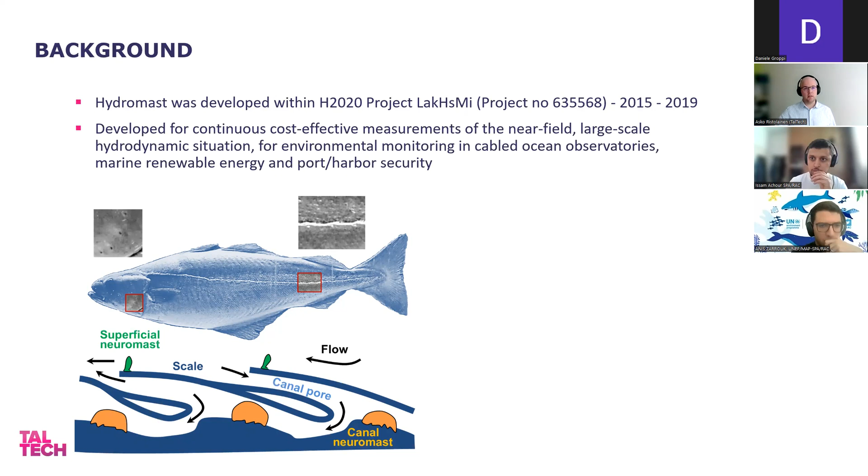The device itself is a small, quite cheap point measurement device that allows to take measurements near the seabed, or actually that was what it was planned for initially. It's bio-inspired. Just a short information about the bio-inspired aspect: fishes have these small superficial neuromasts on their lateral line sensing mechanism. And we took this idea and made it into a sensor that you can see in the picture here. This is the very first prototype back in 2016, where we used accelerometers and 3D printed parts. Since then, we have developed this sensor further to be usable also in field applications.

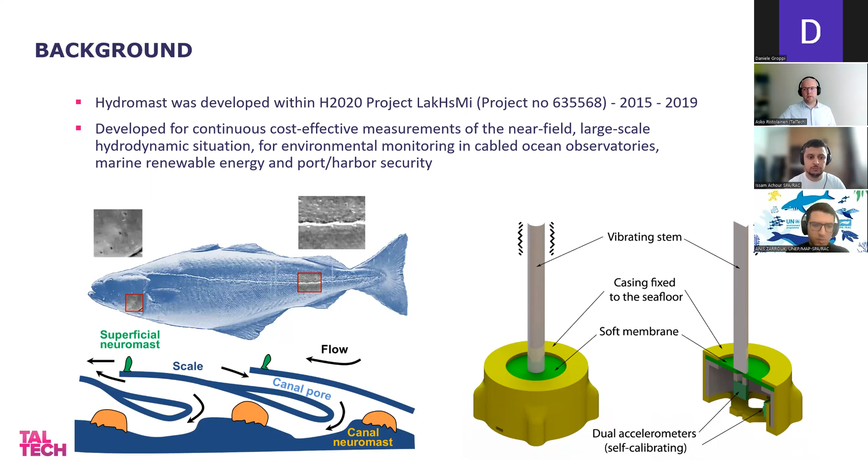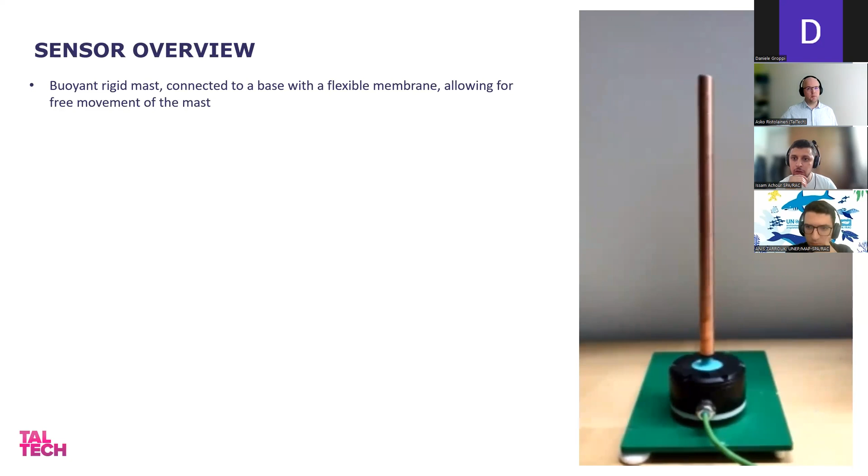So now about the sensor itself. The sensor uses a vibrating mast, and by looking at the vibrations of this mast, which is fixed to the base through a flexible membrane, we're able to measure flows and flow directions, and we are using two different measurement techniques. In order to measure the tilt of this mast, we are using a 3D Hall sensor inside the body of this device, and we are using two ways to measure flows.

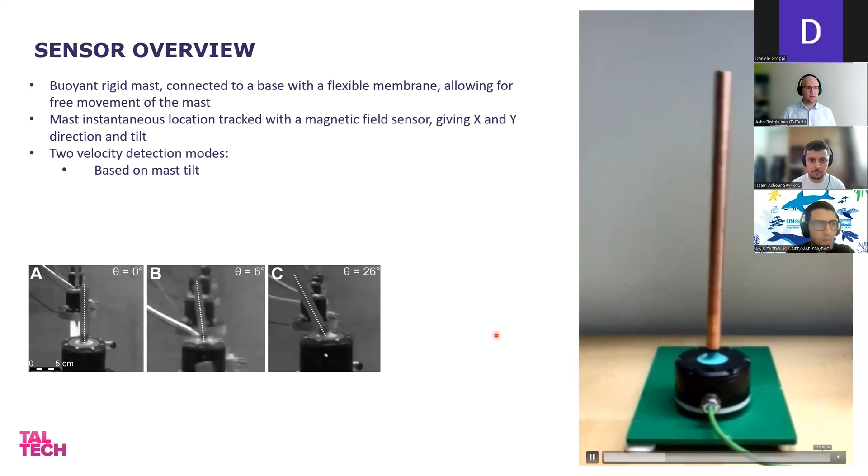First of all, we use the tilt of this mast to say how strong the flow is. So this means that we can measure the velocities instantaneously. And the second method that we're using for measurements is the vibrations that are caused by the flow.

So if the device is in a flow field and the flows are continuous, there are vortices that are shed off from this mast. And by doing a Fourier transform on these vibrations, we can then correlate it back to the continuous velocity. So the second method is basically used for averaged velocity estimates.

And also we can tell the flow direction from the mast tilt, so you can also say where the flow is coming from. And also inside the body of the device, we have an incorporated absolute pressure sensor. So we can measure the waves at the shallow waters, and also sea level if the device is installed at higher depths.

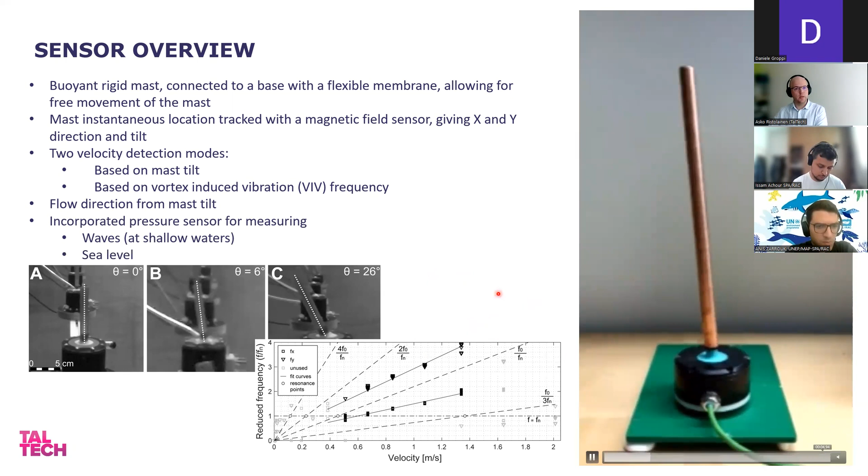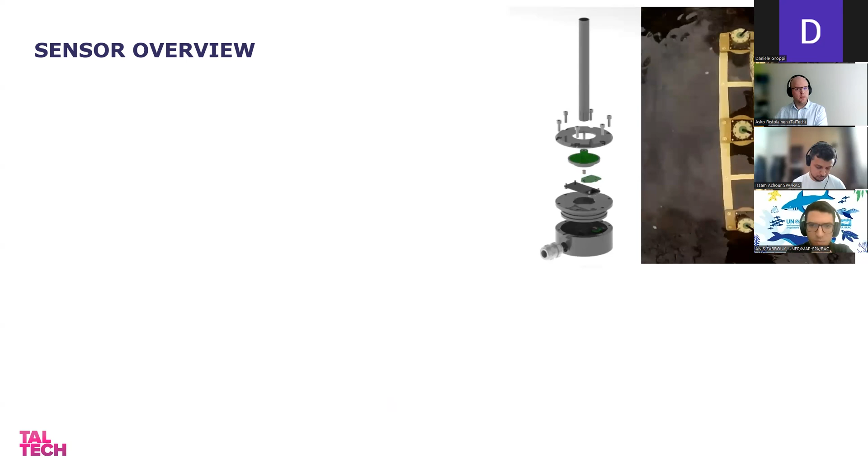So, more about the overview of the sensor. The sensor can measure flows in different flow ranges, and it's dependent on the height of this mast. Also, we can have different kinds of pressure sensors on the device to allow the sensor to be installed deeper, or if we want to have higher resolution of the sea surface fluctuations, we can have a smaller range pressure sensor on board.

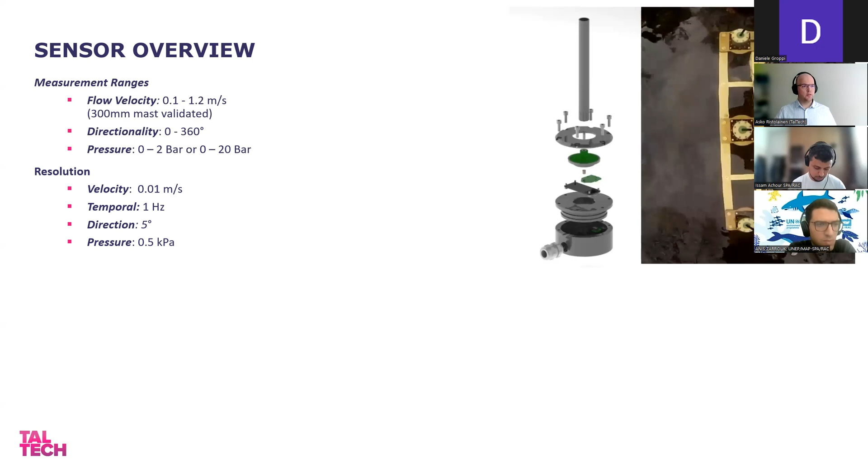Some information about the resolution. Accuracy of the device: it's calibrated and compared against a Nortek Vectrino ADV in a lot of validation experiments. And from the device, the data output can be selectable, although the device itself is working at 50 Hertz, so you could get instantaneous velocities out from the device at quite high rate.

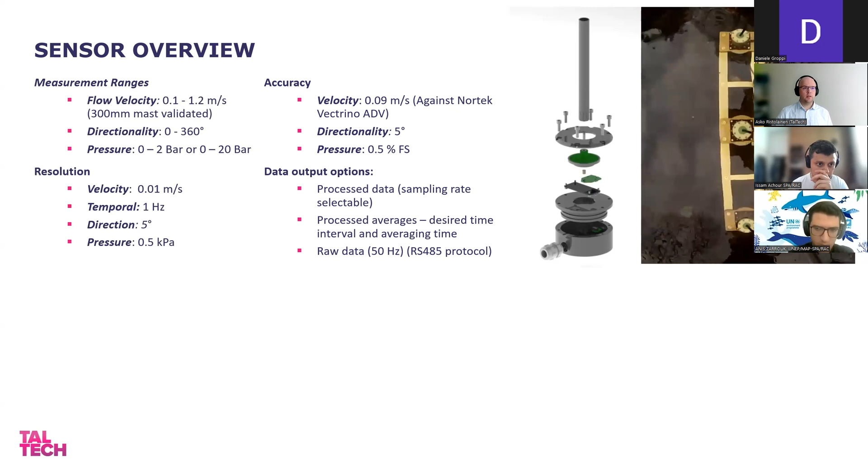And the communication of the device is working with the RS485 protocol, so we can have really long cables on the device. And some samples of some long data sets and some short instantaneous velocities.

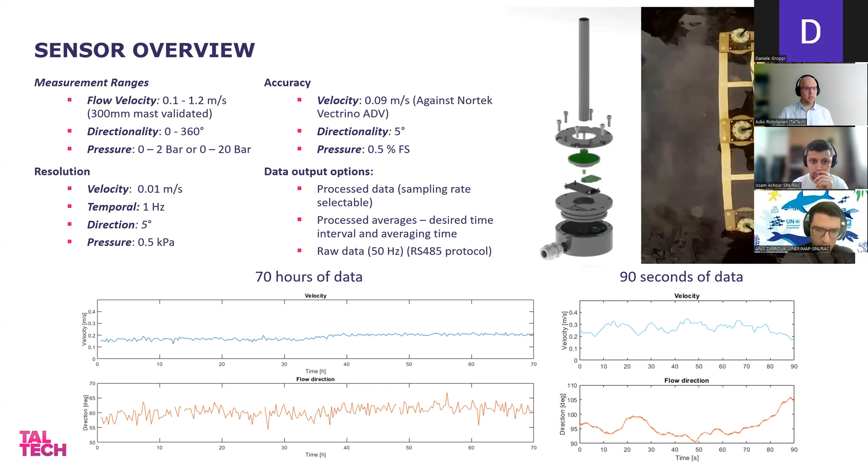So currently in ILIAD, the main aspect that we are working on actually is building communication possibilities for the device. So there are various ways you can get the data when it's installed somewhere in the sea or in the river. Directly from the device, as I said, you can use USB or RS485. That allows a communication up to, let's say, 500 meters from the device itself.

Then what we have built to connect up more sensors are these sensor hubs. With that, we use a mini computer inside there to interrogate the device, but also pre-process the data. So we use currently BeagleBones, but previously also we have been using Raspberries. And this sensor hub can then be connected via Ethernet, via GSM to the network.

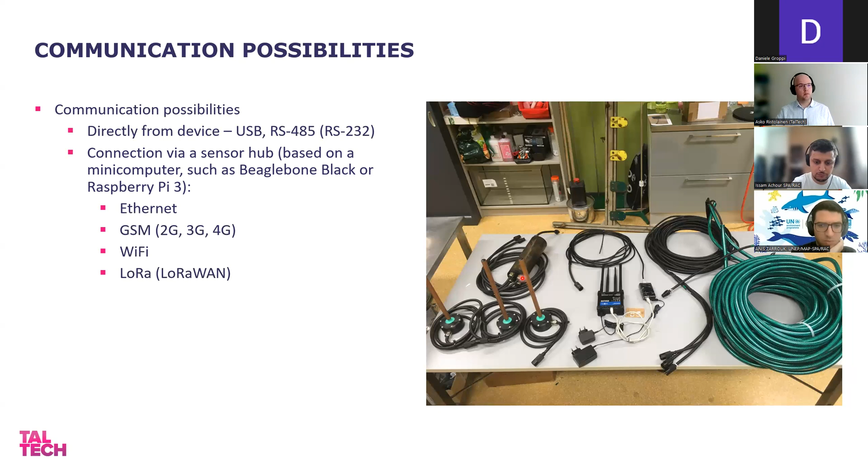You can use Wi-Fi. And currently the latest development is that we are starting to use also radio signals to send the measurements to the users. And also serial connection is possible with the sensor hub. So there is also a possibility to use the sensors offline. For that, we have a battery pack that can be installed underneath the sensor.

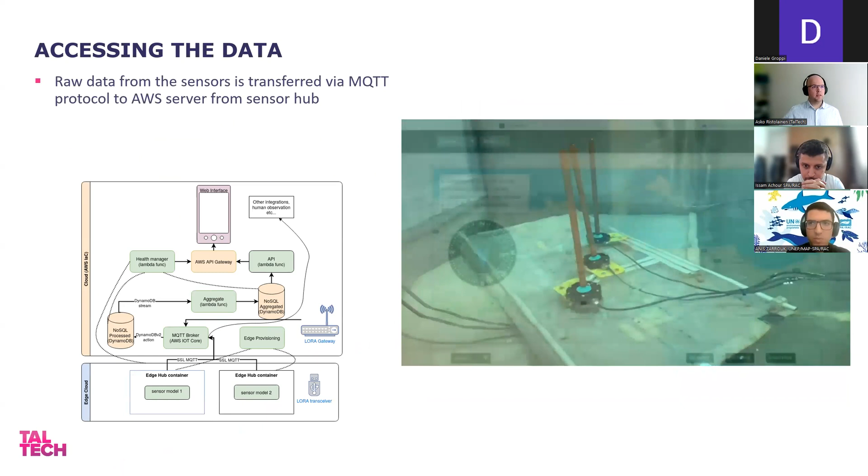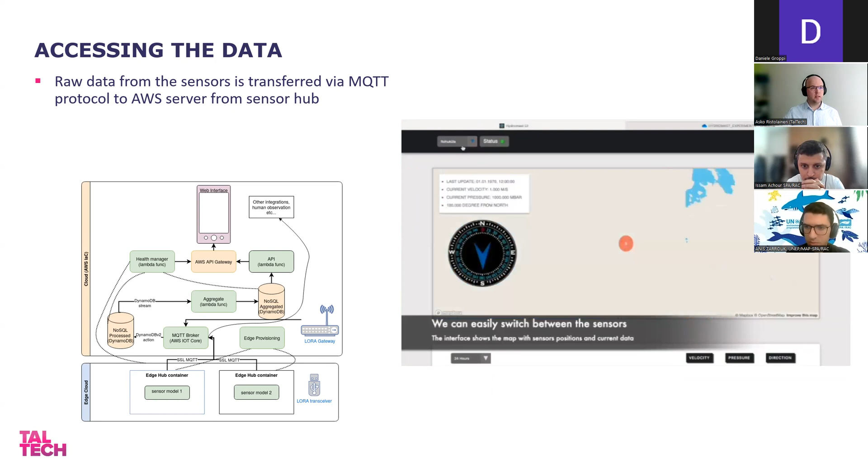So, how to access the data? The data is then, as I said, pre-processed in the sensor hub, and the data is then sent via MQTT protocol to Amazon cloud server, where the data is stored. And then the data can be accessed through AWS API for the different pilots.

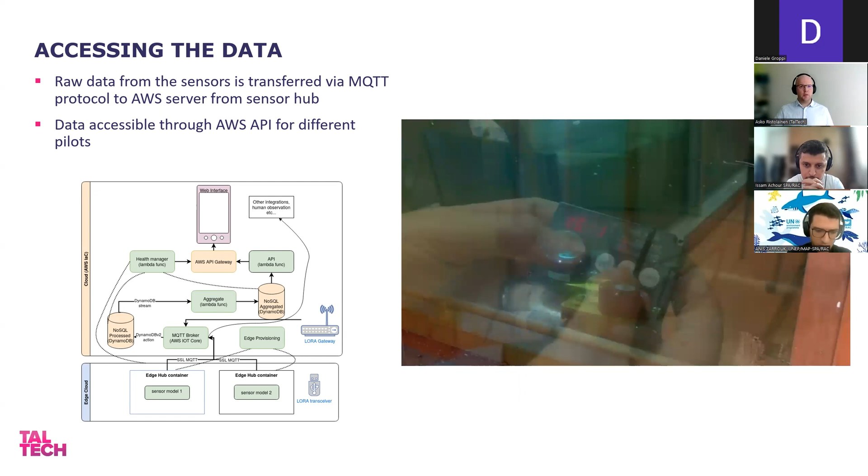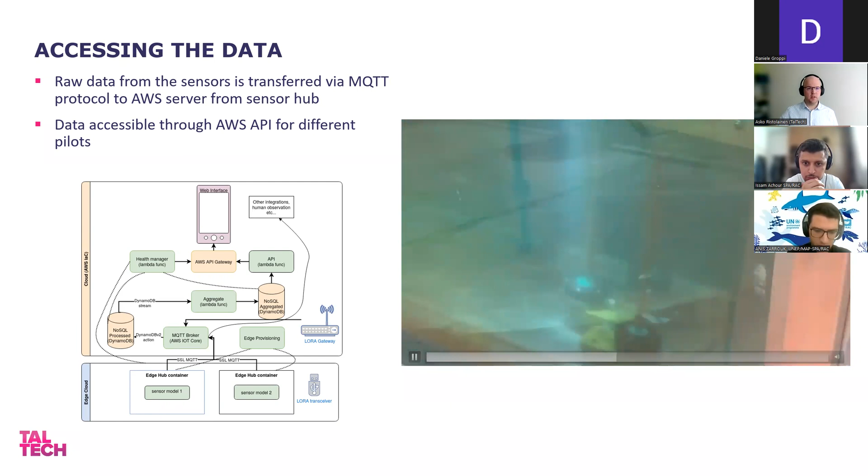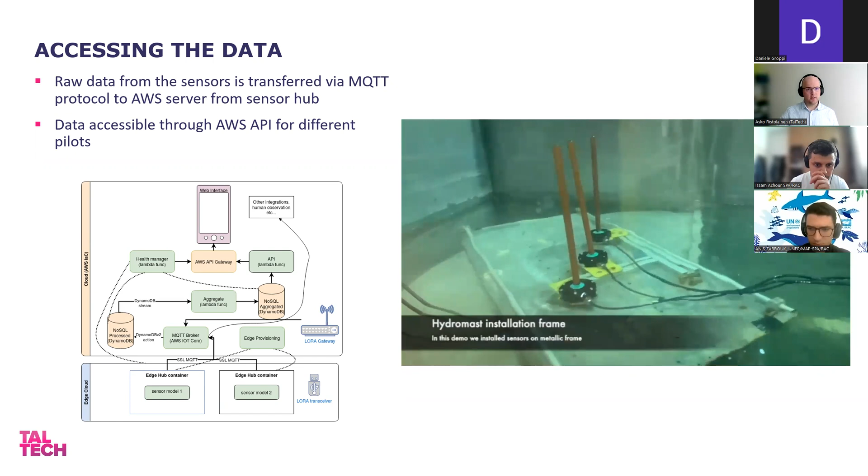And here on the video, you can see a sample scenario where the devices were installed in our own lab. Basically, we generated artificial flows, let's say. The sensors were picking them up. And then, okay, it doesn't play.

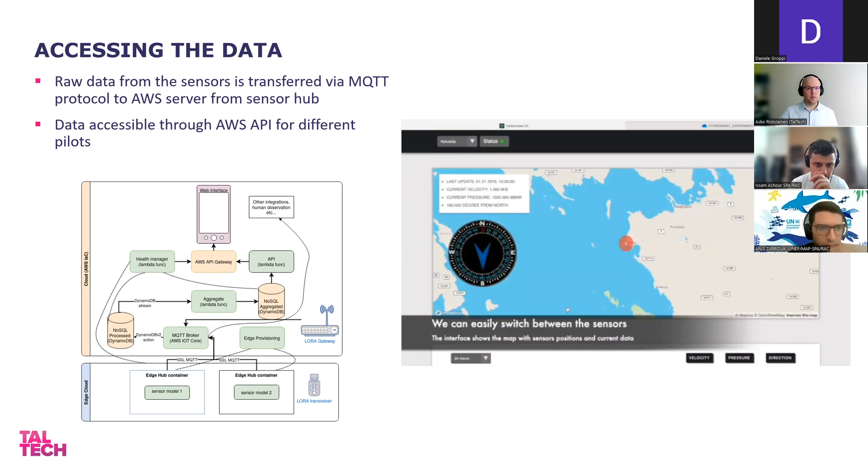Then at the end, we basically have a graphical user interface where different installation sites can be chosen, and data outputs can be viewed in this web interface. So yeah, just a picture of that. This is also being updated at the moment, for our own testing purposes.

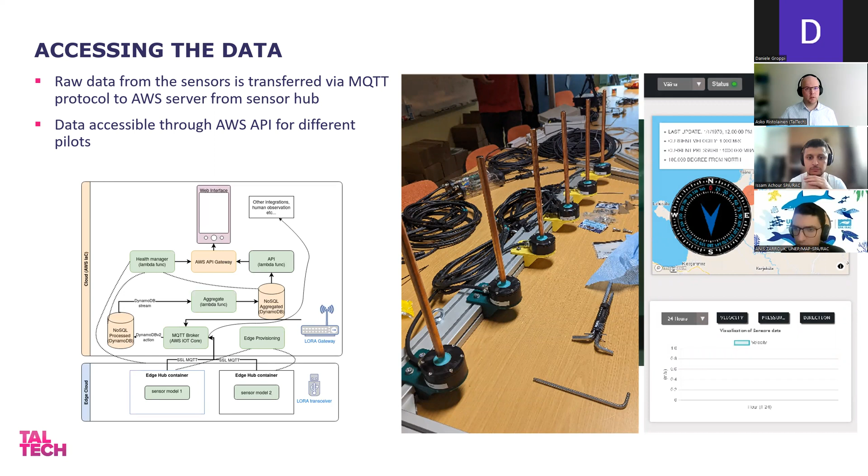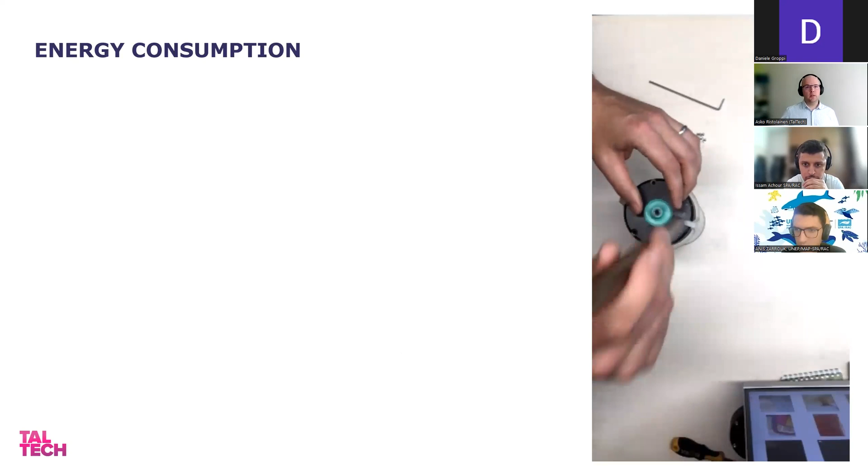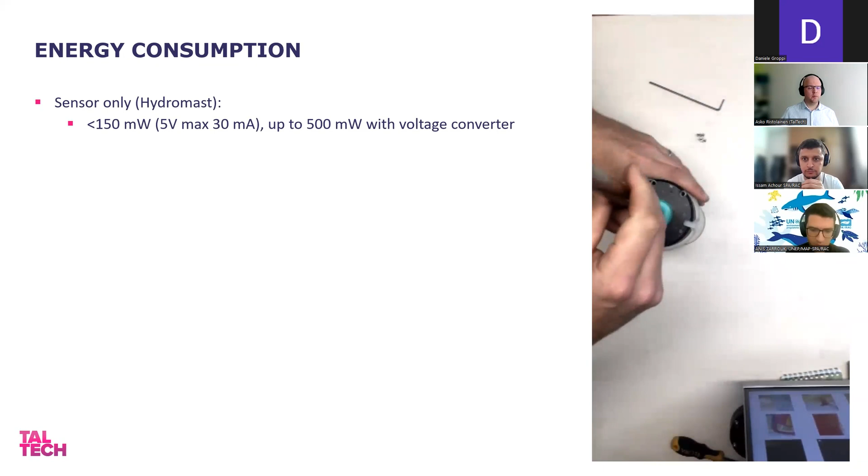So the energy consumption of the device is rather low. The sensor itself uses just below 150 milliwatts. It can be powered, the minimum is 5 volts and it can go up to 12 volts, the input voltage. Then with Ethernet possibilities, it's just below 3 watts.

When we are using GSM, this is actually the most costly possibility. It would be around 6.5 watts. With Wi-Fi, it's also quite low, and with LoRa, it's also quite low energy-wise.

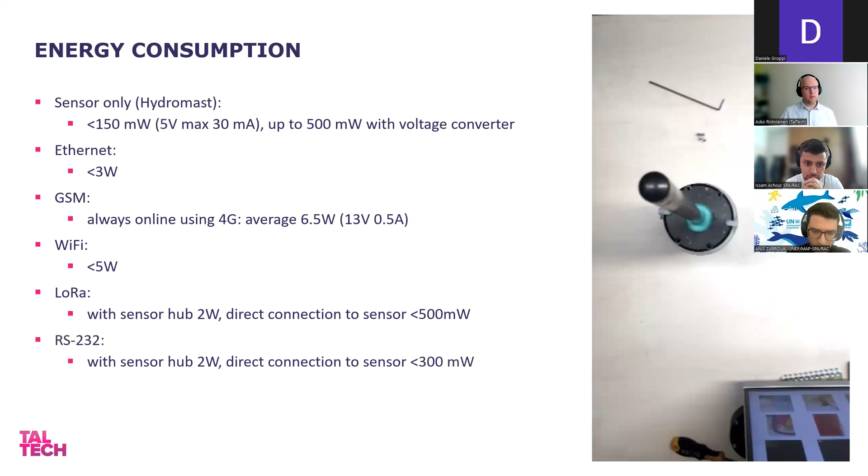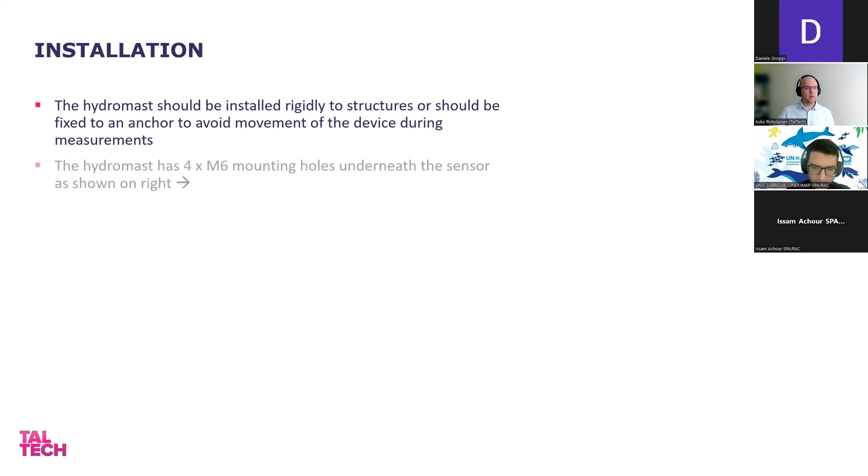But now I will talk shortly about the installation possibilities. The HydroMast should be installed on rigid surfaces or structures to avoid movement of the device base during measurements. The HydroMast has mounting holes at the bottom of the device. There are 4 M6 holes onto which we can install different brackets or mount the device directly to a

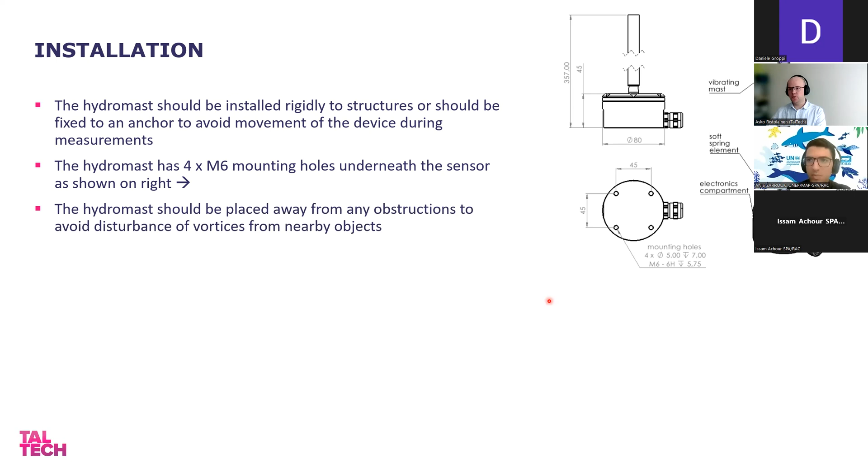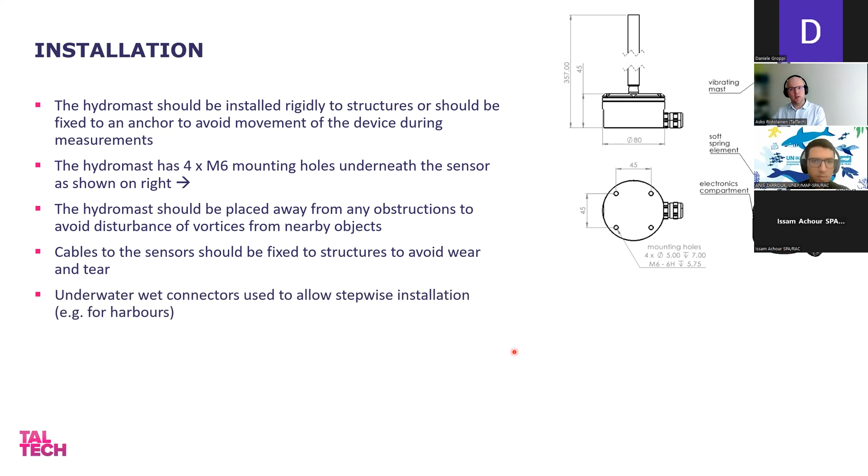structure. It should also be installed away from obstructions to avoid disturbances of vortices from nearby objects. We have also learned that cables of the sensor should be fixed on structures to avoid wear and tear. On the device, we are using wet connectors, which allows stepwise installation, for example in harbors, where the installation frames can be mounted on rigid structures. After that, the cables can be fixed and the sensors can be connected underwater as a last thing.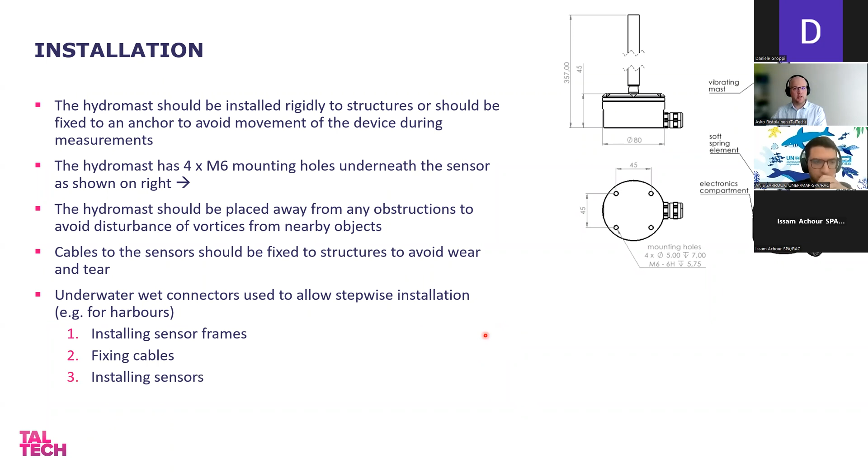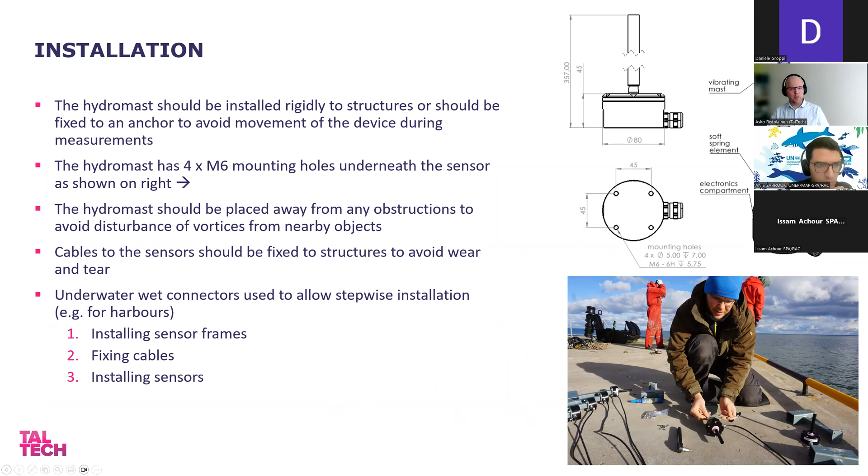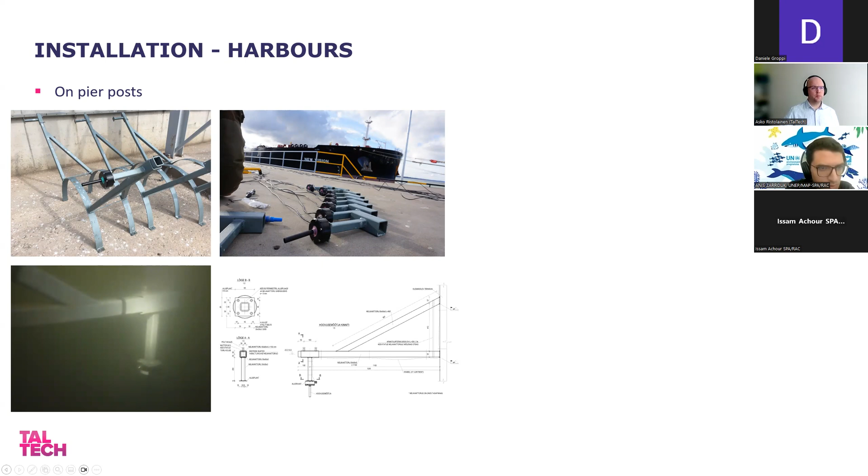Here is an example of field work in one of the ports in Estonia, where we installed 16 of these sensors. Now I will show you some installation options that we have used in our pilots and test sites. As I said, we have worked in harbors, where we installed our sensors to pier posts under the pier with a rigid frame. We have also installed our devices on pier walls with some metal profiles, which is also a quite easy and fast way to produce.

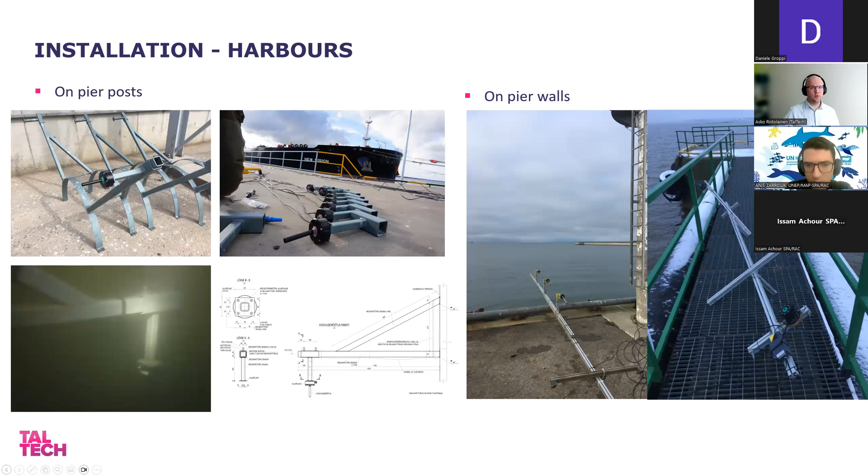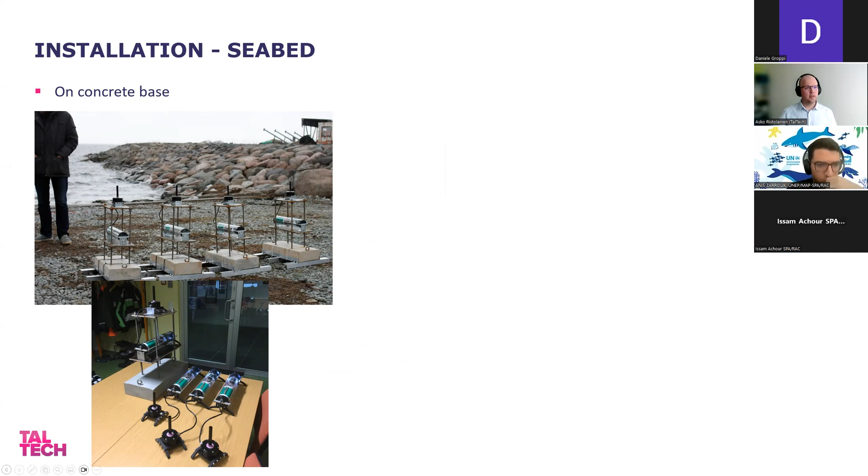On the seabed, we have used concrete bases for installation with offline devices. This makes sure that our devices are upright and fixed quite well. We have also used metal frames for installation on the seabed with offline devices, and also some metal frame examples in harsher conditions.

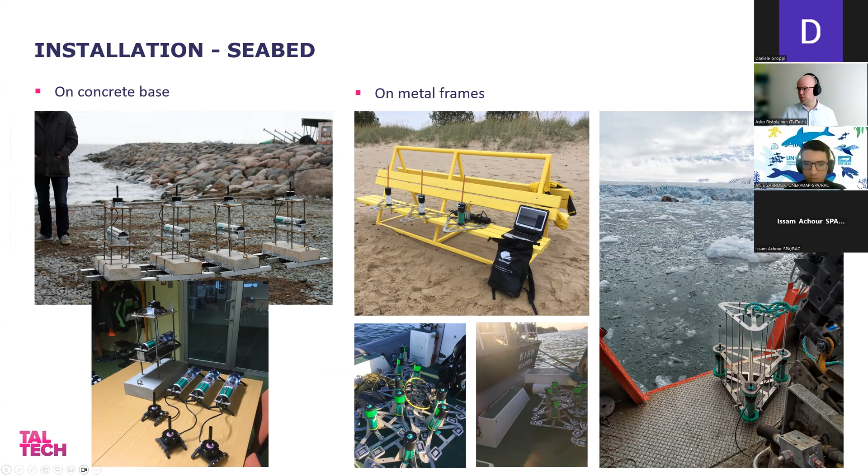We have also done installations with large frames on the seabed. On the bottom left image, this frame was 5 by 5 meters, but on the right-hand side is an installation of 9 of these devices for measurement of seabed stress and velocities in the Bay of Riga last summer. This frame was 20 by 20 meters.

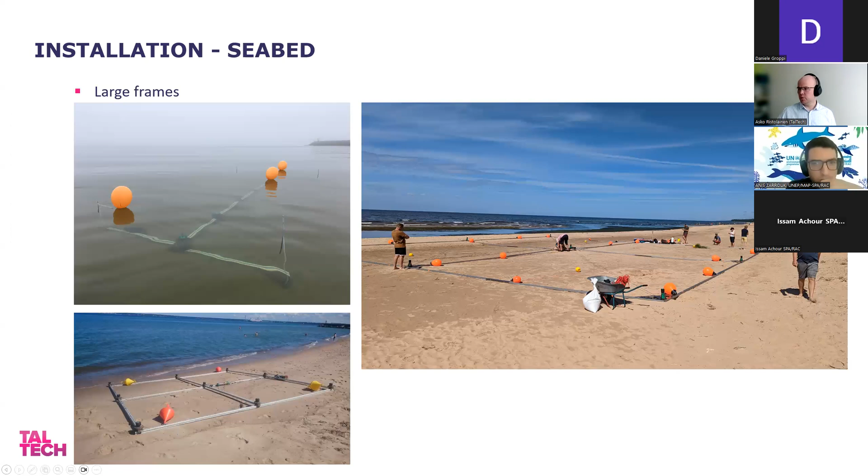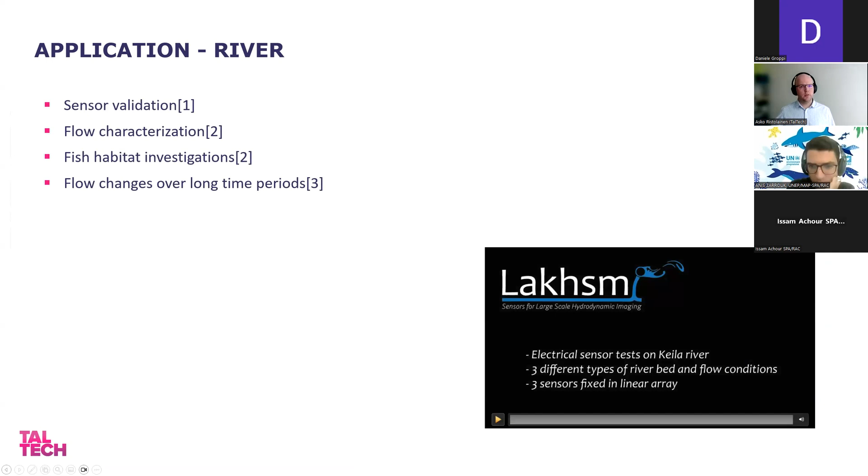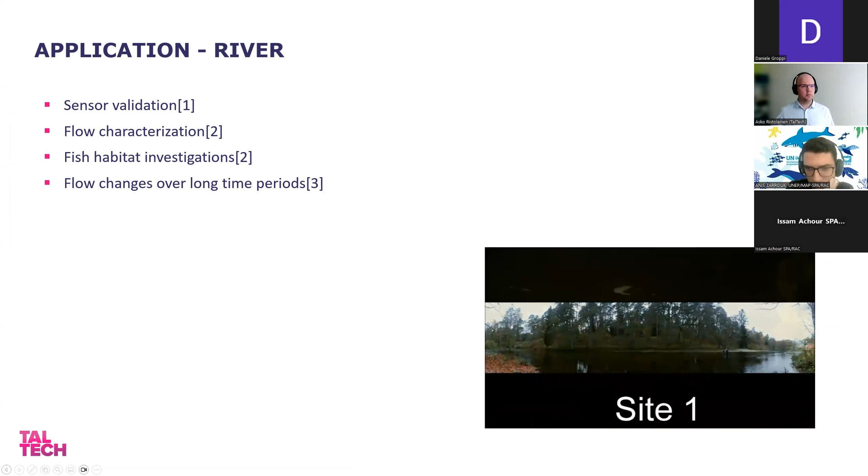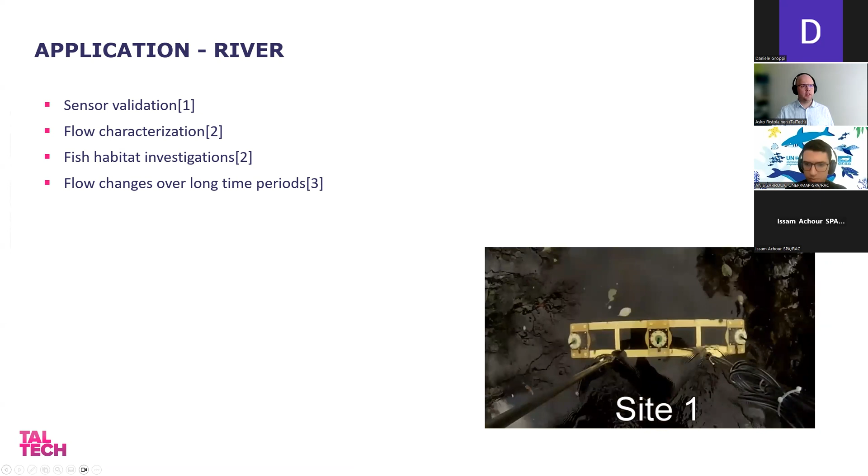Now I will talk about applications for our sensors that we have done already. First of all, we have worked in rivers quite a bit. That allows us to do sensor validations very nicely. But we have also done studies investigating different flow types, turbulent and non-turbulent flows, fish habitat investigations, and monitoring flow changes over longer periods. You can find papers about these works in the articles below.

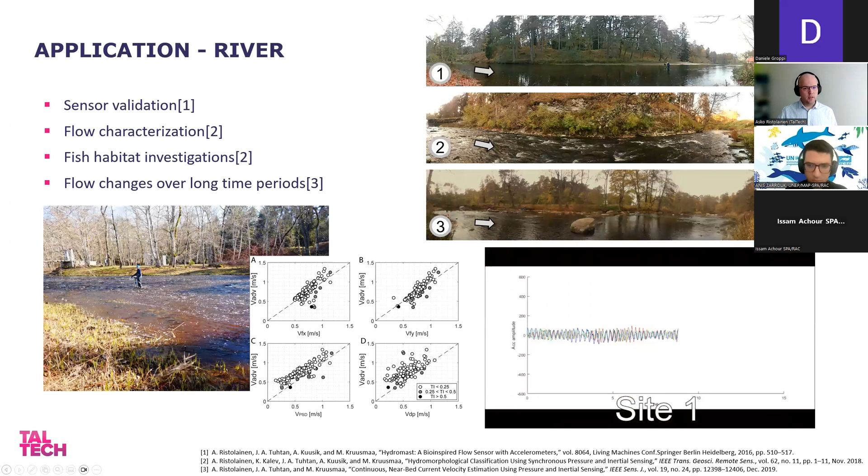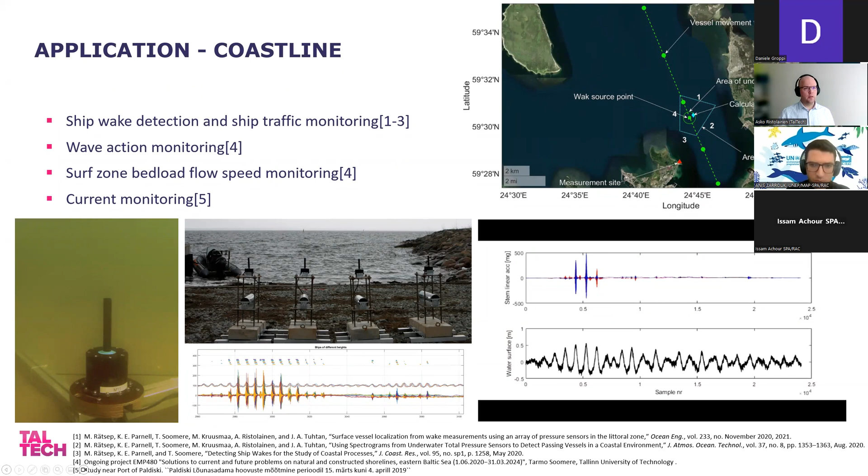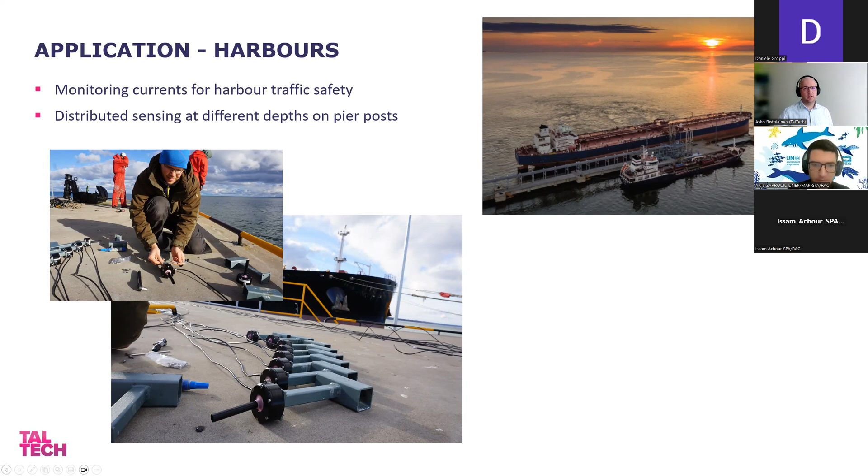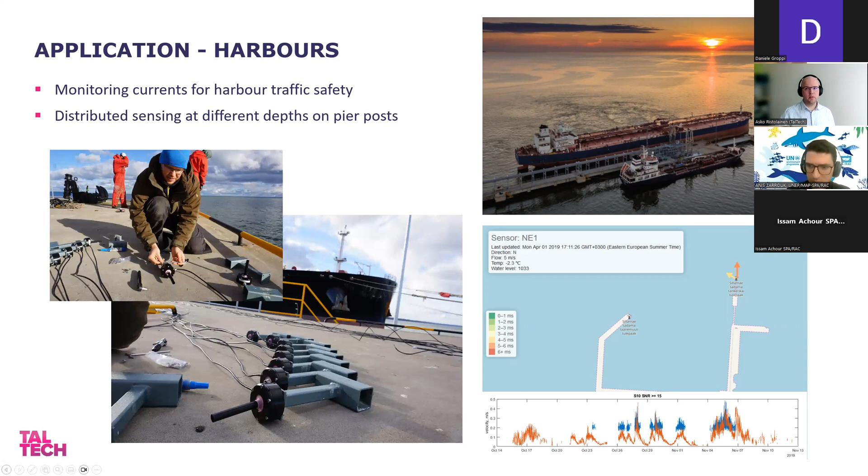Then in harbors, monitoring currents for harbor traffic safety. You can also have distributed sensing at different depths in the harbors to understand at what depths the water is moving, and give this information to harbor captains to allow them to dock big tanker ships. In this application, we were giving live velocity information from our sensors to the ship captain, so they were able to understand how they should approach the docks and what currents to expect, to avoid challenging or dangerous situations.

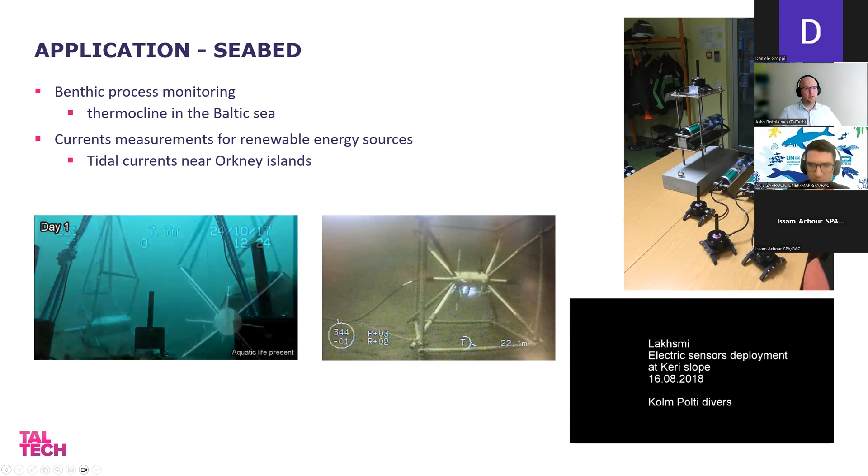On the seabed, we have done some studies measuring currents for renewable energies. One of these examples was done in the Orkney Islands in Scotland, and in the Baltics we have used our sensors at quite high depths, up to 70 meters if I'm correct, to measure natural water movement caused by the thermocline. This is a natural effect that happens here during the summer period when hot and cold water levels are mixing and creating currents like that.

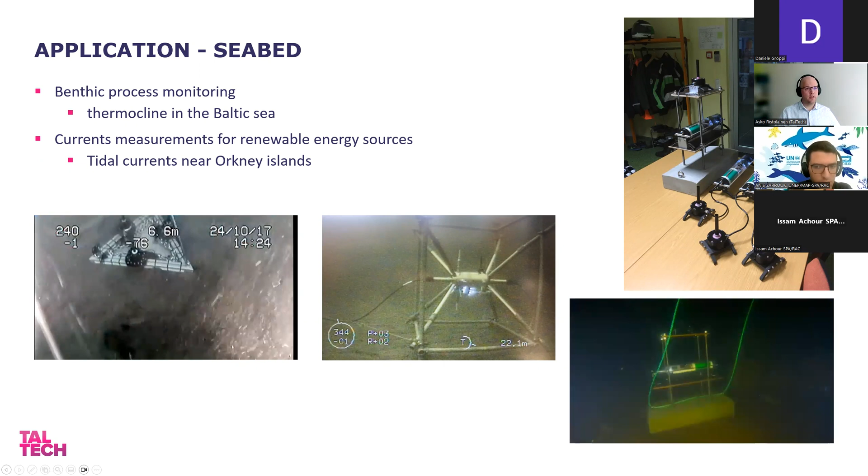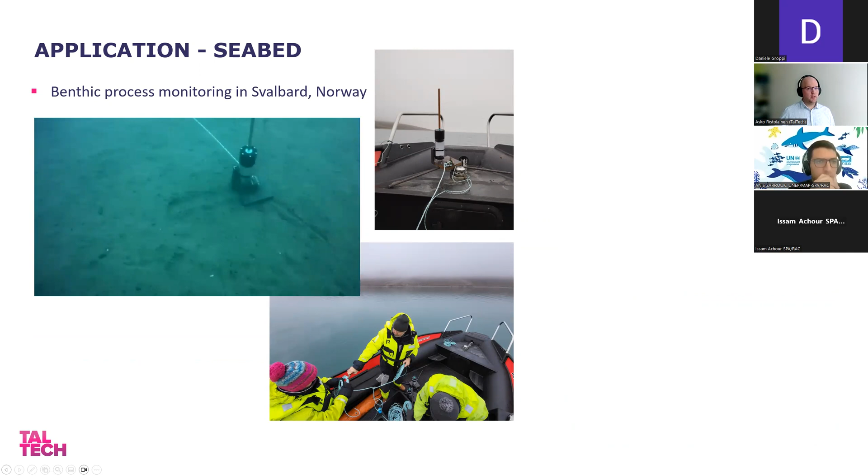Last summer we also installed our devices in Svalbard, Norway, which is very far in the north. The point of this study was similarly to understand how the currents are moving over the winter period. These devices were installed last September, and they're still there measuring. We're hoping to get those devices back sometime this summer when the sea ice has melted enough.

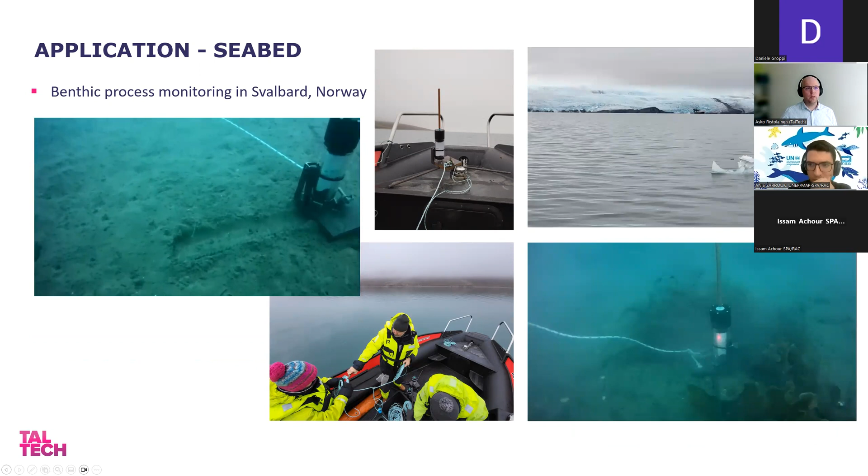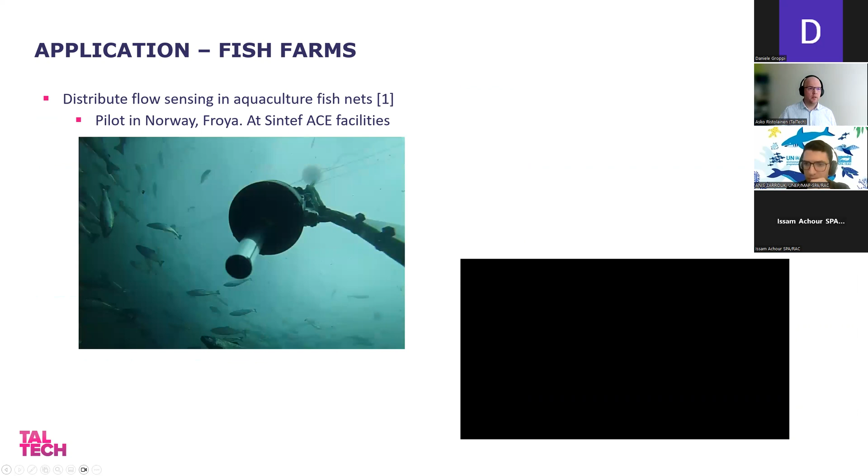Then also we have applied our devices in fish farms. We tested our previous versions of these sensors in a fish farm in Norway, and we're able to measure flows through the fish cage, and that basically indicates if the fish nets are clean enough, if there is enough water motion to allow the fish to be healthy, and the currents through the fish cages are also important for transporting the waste from the fish cages.

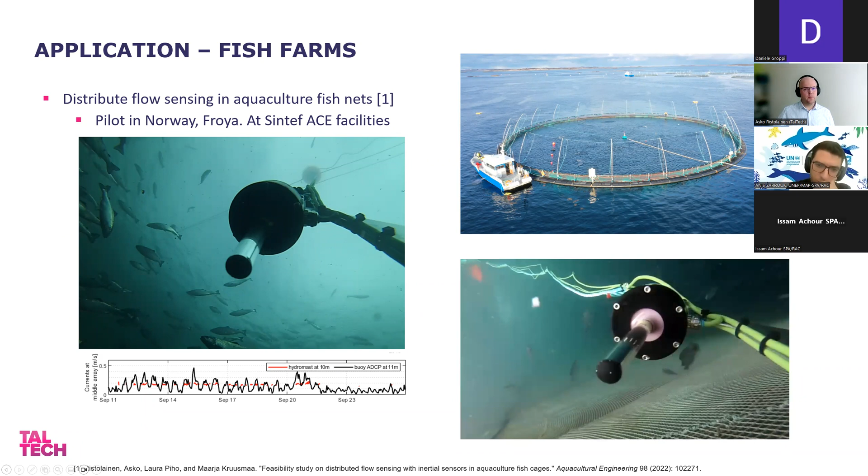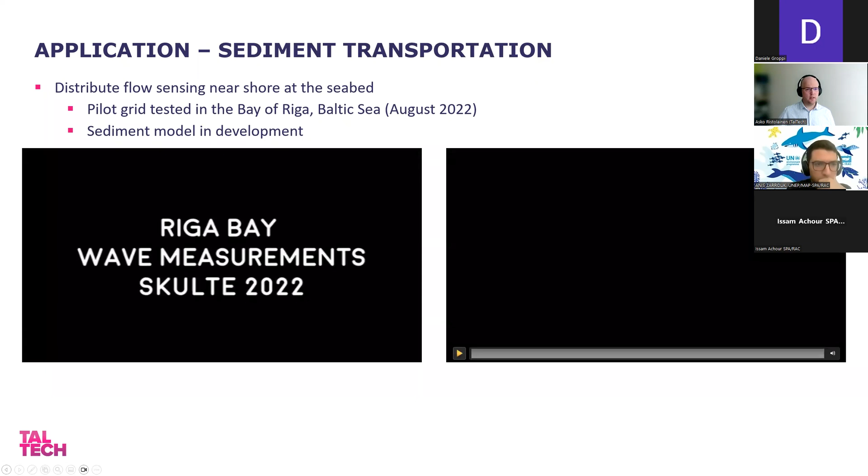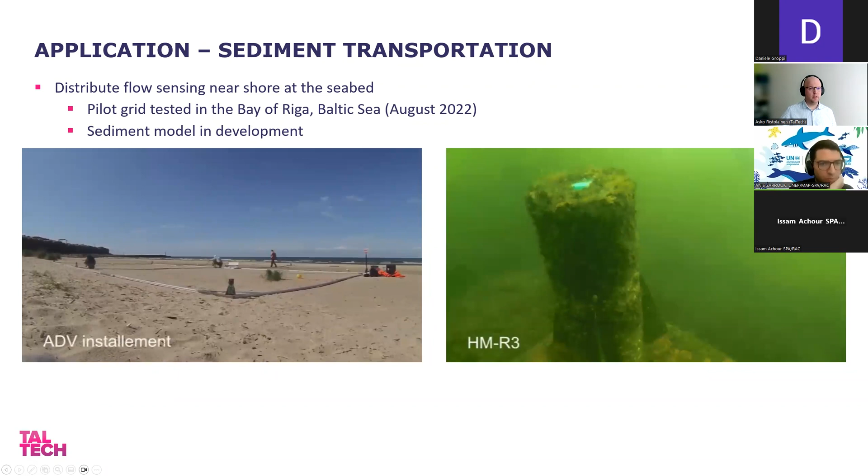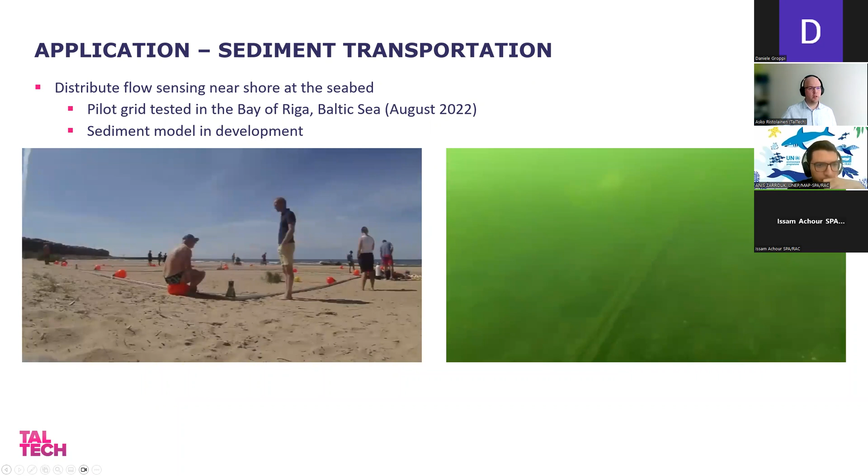And finally, sediment transportation studies. We did a big study in August last summer, where we, as I said, installed a 20 by 20 grid to give validation information for sediment transportation modeling. And this was done as part of an Iliad project. So in Iliad we have a pilot where we try to improve the sediment transportation modeling by giving researchers validation data for their models.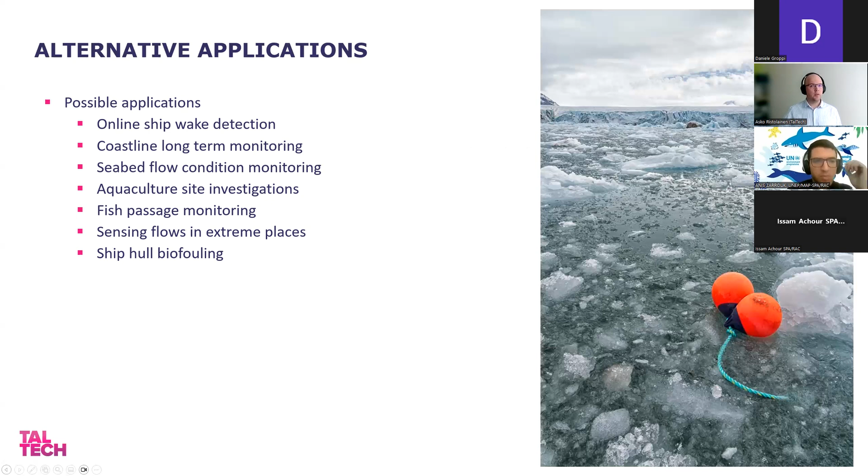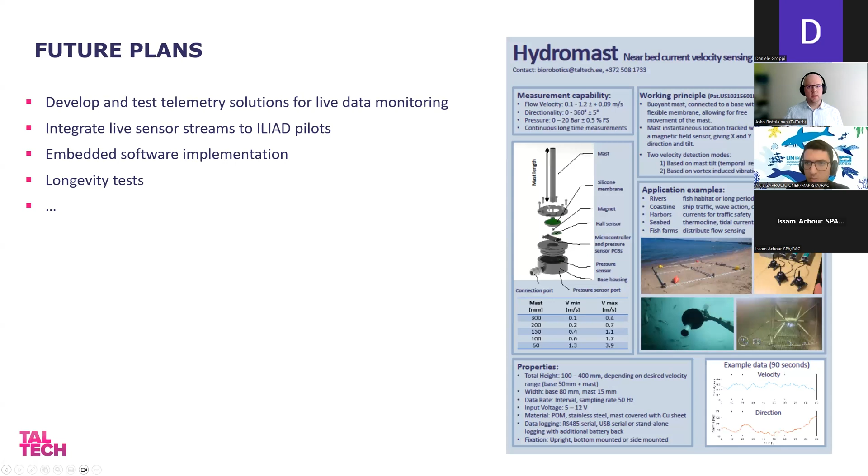And the future plans for our devices are basically the improvement and development of telemetry solutions. Now we're integrating our sensors into the pilots and giving the pilots live data streams for currents and waves. And also we are currently working on embedded software implementation, meaning that we want our devices to give out the velocity and wave information directly. So this is ongoing work, and currently we're running longevity tests by our own pilots, but also probably going to do that in the Mediterranean, as we haven't been there with our sensors yet.